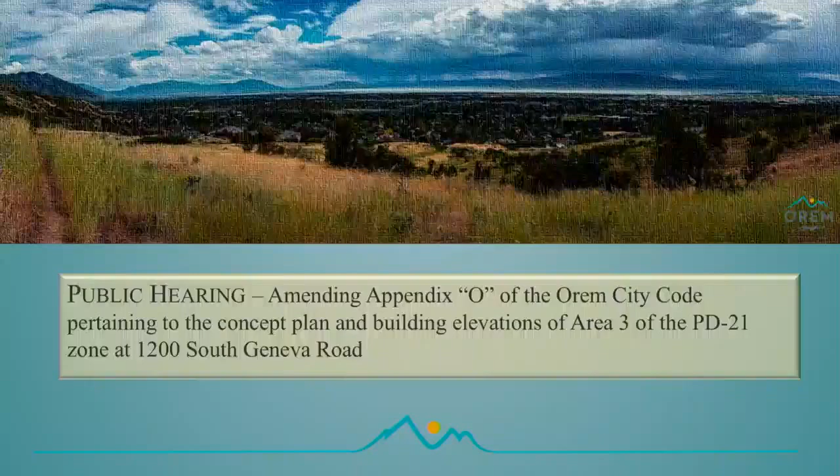So, as you mentioned Mayor, before you tonight is an amendment to the concept plan and the elevations proposed for Area 3. If you recall, back in August of 2015, they came before you and made modifications to the text and the concept plan. As they went into additional design of the project, they discovered they needed to make some modifications to that concept plan to make it more functional and pencil for their project.

Just to point out the areas: Area 1 is the Wolverine Crossing, which is existing. Area 2 is the University Lofts, or Parkway Lofts, currently under construction. Area 3, adjacent to University Parkway, is the area we're talking about tonight. So we're only discussing Area 3 pertaining to the concept plan.

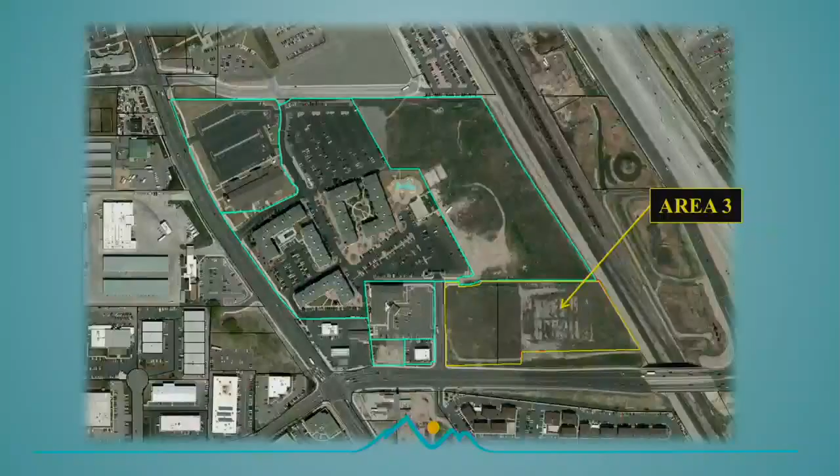Currently they have on the concept plan 214 units, 627 bedrooms, and 1,024 total beds. As you can see before you, they're proposing 437 total units, 927 total bedrooms, and 1,548 total occupancy units. The PD21 zone was set up to have a minimum standard, not a maximum density, so they're well within that since there is no maximum. As long as they can meet the parking and other requirements of the ordinance, they're well within their boundaries.

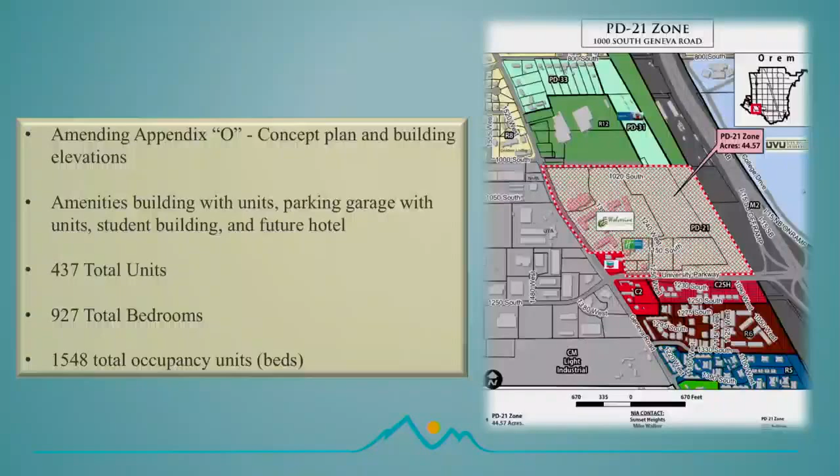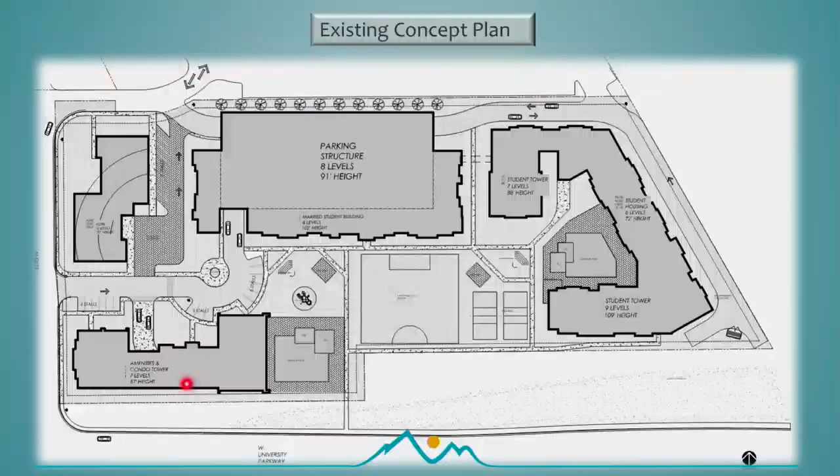What they're proposing is to modify the concept plan before you tonight. This is what was approved back in August. You can see on the concept plan that they originally had wrapped married student housing at this location. They had the student towers, as they were calling them, at this location, the amenities building here, and a future hotel here. They're keeping all the same features, just modifying portions of that.

You can see the parking structure has reduced in overall footprint, but they're keeping the same height, with a full height structure having just 1 unit per floor for that entire section. So they're basically reducing that, shifting all those married students into a combination of student wing and married wing that you can see at this location.

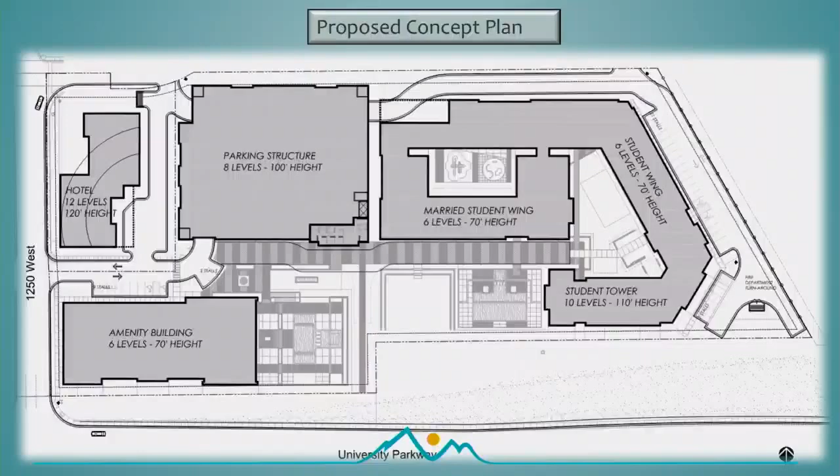The 120 feet is the maximum height within the zone. The ordinance was changed back in August to reflect either 120 feet or what's listed on the concept plan. This concept plan lists each building and the heights that would be approved at that location. So the hotel would still be 120, the parking structure at 100, the marrieds at 70, and the student tower next to University Parkway at 110. The overall amenity building would be 70 feet.

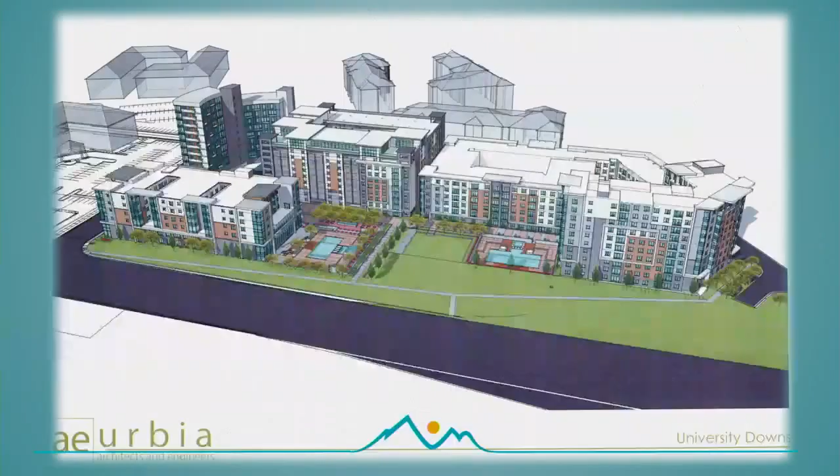So you can see compared to the existing and the proposed, they still have the outdoor recreational stuff, the amenity stuff within the amenities building itself, and parking is accommodated for as well. This gives you the overall concept of what they're proposing. You can see the lofts building in the background—this is what you'll see from University Parkway.

The Planning Commission—I can go through each of the individual buildings if you'd like—but the Planning Commission reviewed this, and basically they're not changing any text, it's simply the concept plan and the elevations that are before you tonight. So I'll be glad to address any questions.

First of all, is the applicant here? Could he come forward? Jason, a question I have—if you can come forward and just sit right there with Joe.

It appears that your population has gone up by about 50% with this program. So how does that affect the parking? The parking is 0.65 per occupancy unit. An occupancy unit is a bedroom that's 110 square feet or less, and if it's over 110 square feet, we count it as 2 occupancy units. That's why the number of beds versus the number of units is different, and that's how we calculate that. So this project meets that parking requirement.

So they've been accounted for this? Yes, and if you can see, the overall concept plan shows—the original, and the architect is here to explain that—but the parking deck will finish at this level right here.

There's some meeting space and other things that will be on top once the hotel comes in. The original build will just be the foundation, footings, and all that to support the additional elevations, but they will not add this element until the hotel is built. So this would be the top of the parking structure.

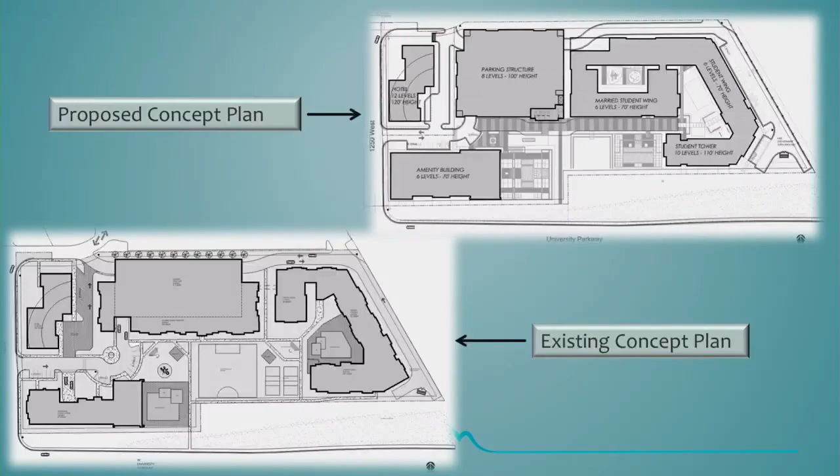Councilmember McDonald: Could you go back to the slide that shows it drawn out? Those other buildings in the background in gray are just the existing land around it, not the subject property, correct? The Parkway lofts, excuse me, they're under construction currently, so this is an outline of what they look like.

Do you have an idea of which order you'll be building the buildings, or are you going from the ground up all the way? Are you building this in stages, or everything but the hotel right away?

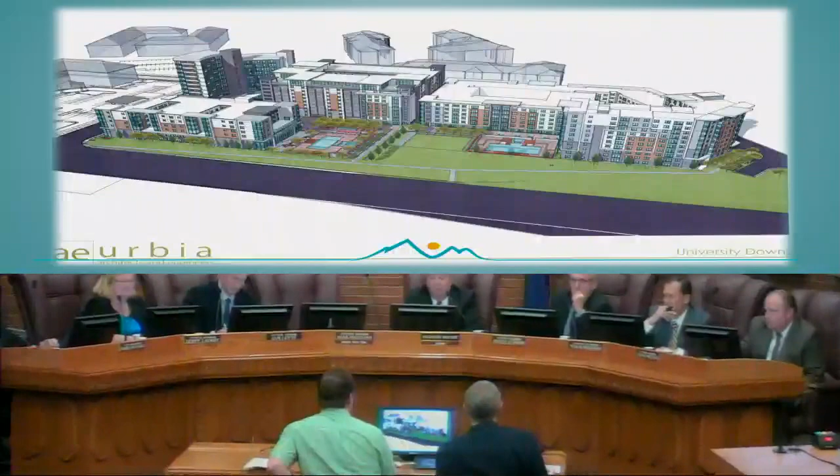So the three major buildings are going up right now. The hotel is being planned for in the future. We just don't have a hotel chain and all that yet. You don't have a flag to fly yet? Not yet, correct.

Any other questions? Councilmember Sumner: You have a married wing and a single wing, is that correct? Yes, that's correct.

Can you legally do that, designate this as married and this as single? I don't know. It's strictly just for us to understand the market we're going after. More than likely, because of the market research the owner has done, there probably will be spillover into the married wing from single students and vice versa.

We're calling it the married wing because it will consist of 2 bedroom, 1 bedroom, and studio apartments geared more towards a student who is married, though it could be single students too. Whereas in the student wing, on the far east, those units are 3 bedroom and 4 bedroom units with shared bedrooms, whereas the married student wing units are more geared towards a single bed.

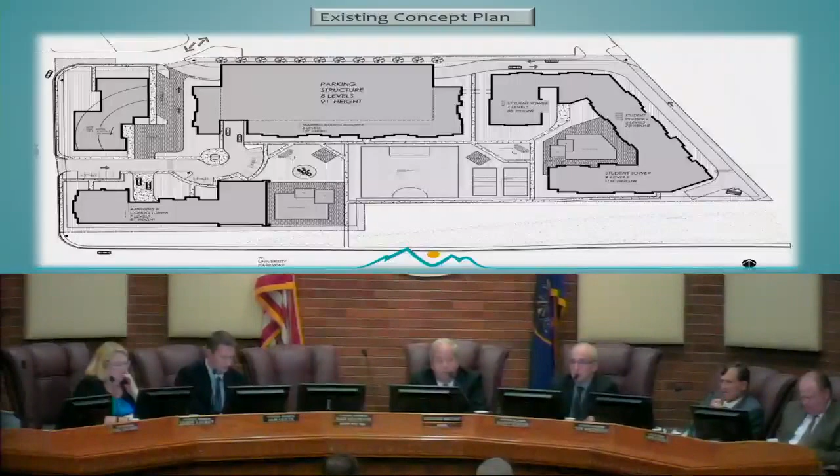So Jason, in that picture previous, it says amenity building and condo tower. So are you selling condos as well? Yeah, the owner does want that option to have those be condos. If there's a high enough demand, those will be condos. If there's not, then they'll be student housing.

And I know you've told us this before, but what amenities are you going to be offering? In that amenity building, there is pretty much everything you can think of. There's a full-size NCAA basketball court on the far east, and then kind of right next to the amenity building there on the east, there's 2 pools. In the middle, there will be a soccer field. You see the nice green grass area there.

In the amenity building itself, there's the basketball court, there's a 2-lane bowling alley, there's billiards, there's a stepped theater area for room for about 50 to 100 people. Kind of a lounge theater, not really like a movie theater, but more of like a lounge theater. There's an exercise room on the 3rd level and a tiny daycare facility as well. So that's kind of, and then the rest will be condos in the amenity building.

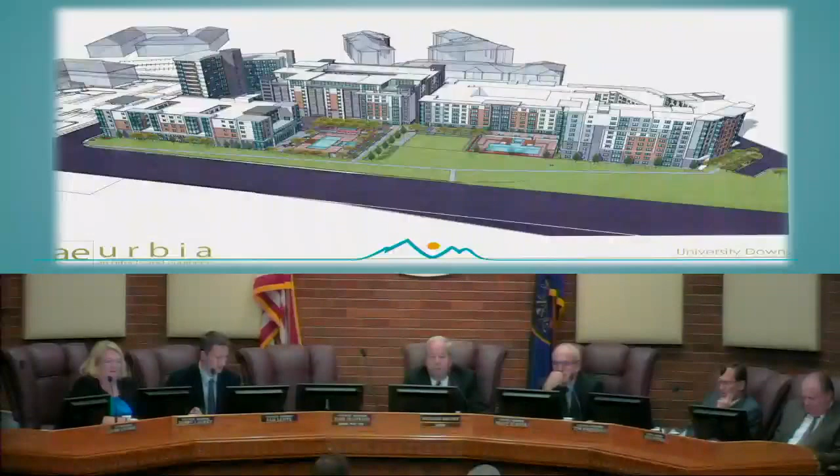As well, there's also kind of in the courtyard of the student building, what we're calling the donut area, where the married students are. There's a splash pad and kind of a playground for the kids, and then a volleyball court and a small climbing tower in the courtyard of the student tower. They won't be without something to do then.

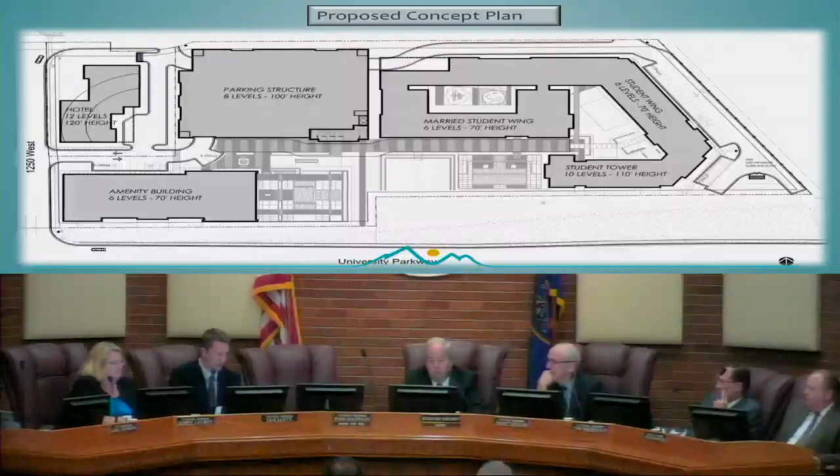No. Councilmember Lentz. So this question is for Jason. A little while ago, there was a city issue where there was concern over building heights, and one of the concerns brought up was that the noticing radius was not wide enough, and people were concerned that this is going to block my view, but I was not notified. I'm just wondering, with that being across the freeway from the majority of single-family housing in that area, how much of that single-family residential area did we catch? I was trying to look through the names of the individuals that were noticed for the neighborhood meeting, but with that being a higher structure, I'm wondering, did we get sufficient notification for the surrounding properties?

We did 1,000 feet, which is what the council recommended, and they had eight people show up. This has been ongoing, the ordinance has been in place for many years. This is simply just a concept plan. The actual heights have been approved because there is a maximum 120 feet, and that's been in the books for quite some time. So this is just a modification to that concept.

Thank you. Seems like to the south, you have mostly apartments across the street. There is apartments. And then to the north, you have the UTA station. If we're going to have height, this is one of the good areas to have that additional height.

Councilmember Sumner. Was a new traffic study required on this, Jason? As part of the site plan, they were required to do an amendment. Paul Goodrich is working with them to get that. So that's not been performed yet? As far as my understanding, it has actually. It was finished this week, so they'll be part of our review to get to the Planning Commission next Wednesday. Okay, yeah.

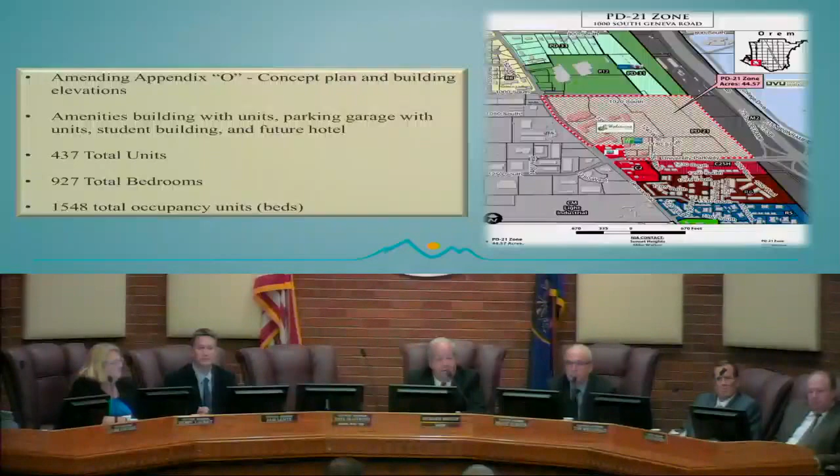Any other questions from the council? This is a public hearing, so we'll go ahead and open it up to the public. Anyone who would like to speak to this issue, please state your name and address and keep your comments to 3 minutes.

Seeing that no one is coming forward, we'll go ahead and bring it back to the council and close the public hearing portion of this. Any other comments from the council?

I would like to make a motion that the City Council amend Appendix O of the Orem City Code pertaining to the concept plan of Area 3 of the PD 21 zone at 1000 South Geneva Road.

Is there a second? Second. Okay. Councilmember Spencer, aye. Aye. Aye. Aye. Aye. Aye. Okay, the ordinance passed.

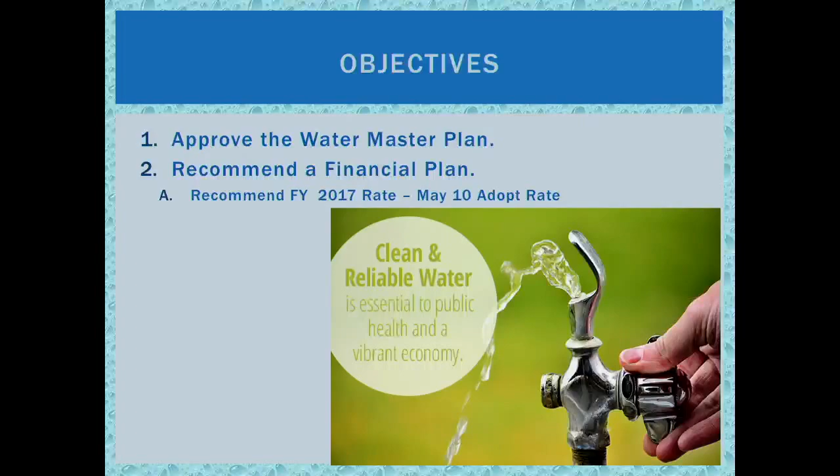But we have 2 objectives tonight. We want to approve the 168-page Water Master Plan, and with that, recommend a financial plan that goes with it to get from where we are to where we need to be.

Our system is not unlike a similar system with water up above. Gravity is our friend in the water business. We use gravity to bring the water down. It provides our pressure. We don't have to pump it. It keeps our water costs low.

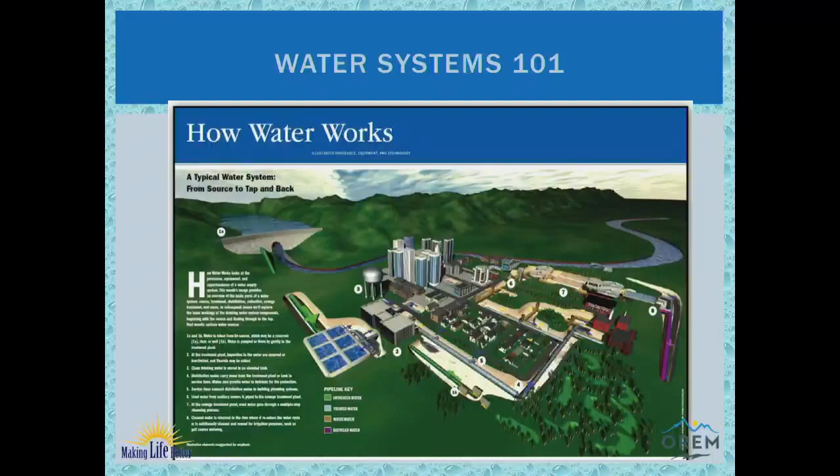We have sources, we have conveyance, we have storage, and we have distribution. That makes up a lot of the components within it. I've broken it down into 4 simple components when the reality is it's a very complex system to run, to bring water that originates up in the Uinta Mountains from snow on down through the river systems, a couple of reservoirs, canals, or rivers, some wells, some springs, ultimately makes it clean and awesome right to your tap.

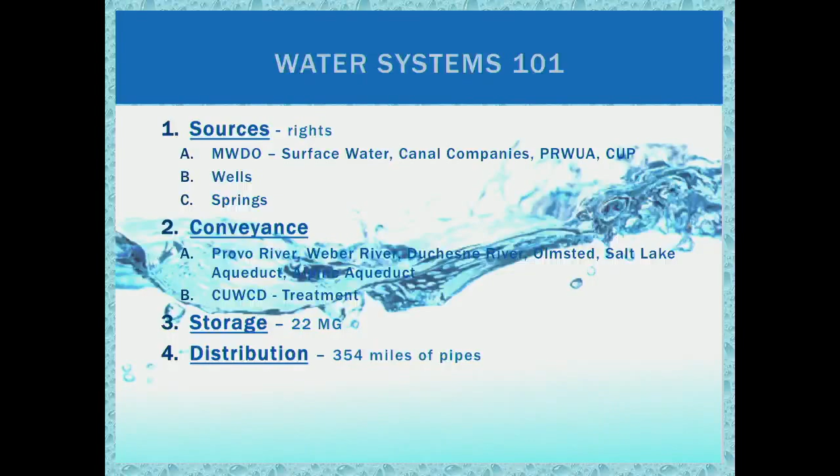It's not seen like some of the other things that are out there. We flip the switch on and it comes on. We can't touch and feel the pipes that are under the ground. Even the walls, even the pipes in your home are covered, and you have the fixture there, and it's there.

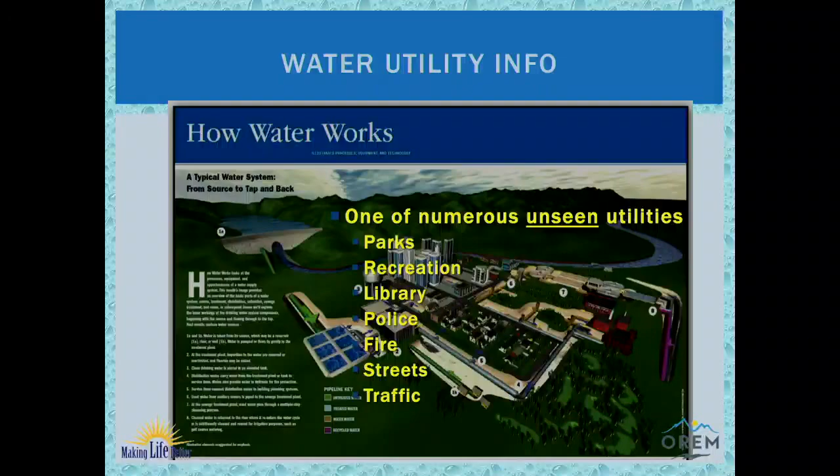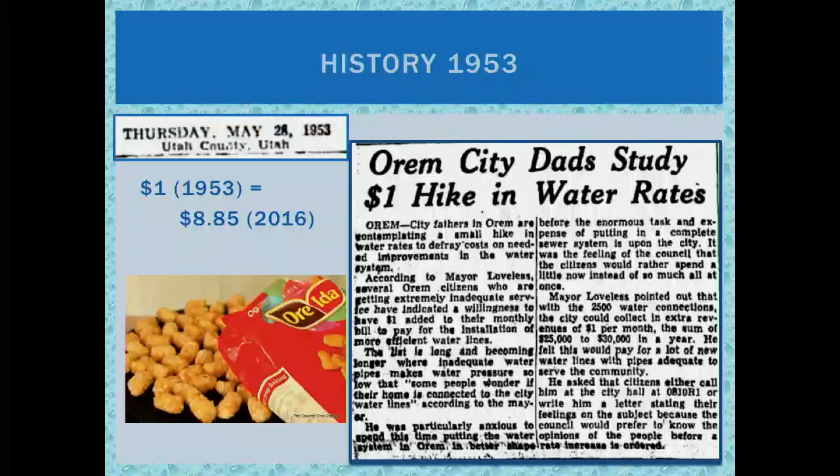1953 was not unlike a night like tonight, where the Orem City dads and now mothers had a decision to make of a $1 increase, which today would be $8.85. In that same year, Ore-Ida introduced their tater tots, which were simply leftovers from their French fry line. Additionally, in that year, Corvette introduced and released, ironically built in Flint, Michigan, this beautiful vehicle. We'll get to Flint maybe in a different discussion.

1955, there was a lot of growth going on. If you look at the little sentence there, you can't read it, but it reads: Orem, the city of tomorrow, the city of phenomenal growth that has only just begun to grow as Utah County extends its industrial expansion. Part of that same newspaper article, they were talking about the growth, the commercial expansion, recreation, a long history of arts, and a long history of culinary water supply in Orem.

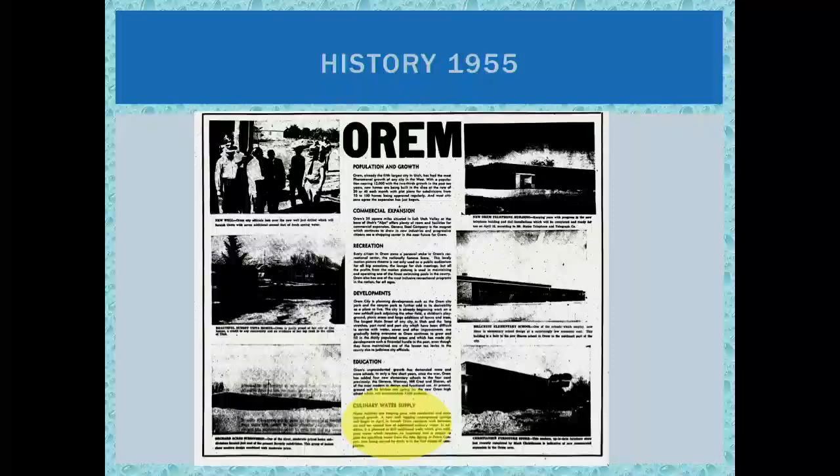In 1960, the manager tells Orem to increase the water. In that same newspaper, T-bone steaks were 69 cents a pound. It made news that a Mapleton woman broke her arm, and right underneath that, Mr. and Mrs. Dwayne Roberry and their 3 children moved into their new home over the weekend, and it was newsworthy.

So we move forward to 1962, and again, Orem is experiencing a need to increase its rates, this time for treatment plant expansion. Prior to that, water would come, we would chlorinate it and put it into the system. FHA said, you need a treatment plant or we're not giving out any more loans. In both water and sewer, an equivalent $7.10 rate was introduced.

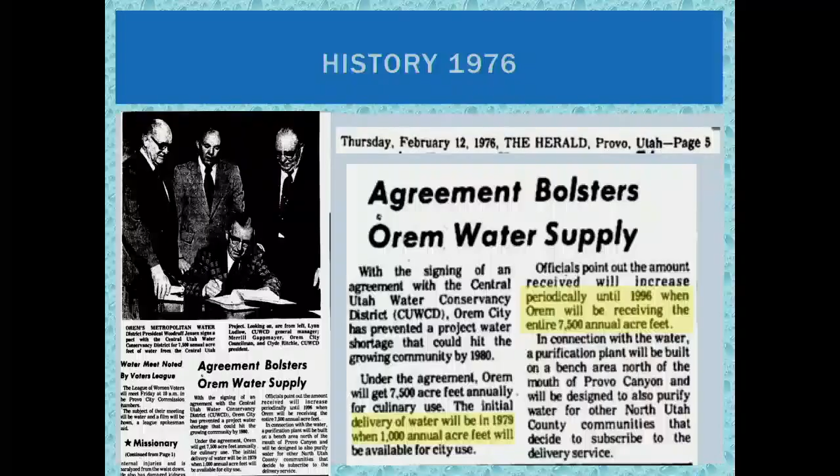Every day we have a very talented staff led by Lane Gray, our water section manager, that are qualified, competent, and proud employees of the water system that they manage. I hope if you see them, you give them a thanks, because they work after hours, they work on cold nights, they work on hot days, on call, and even those who aren't on call that respond to those on-call emergencies should be thanked. I can't say enough about our section and the work that they do.

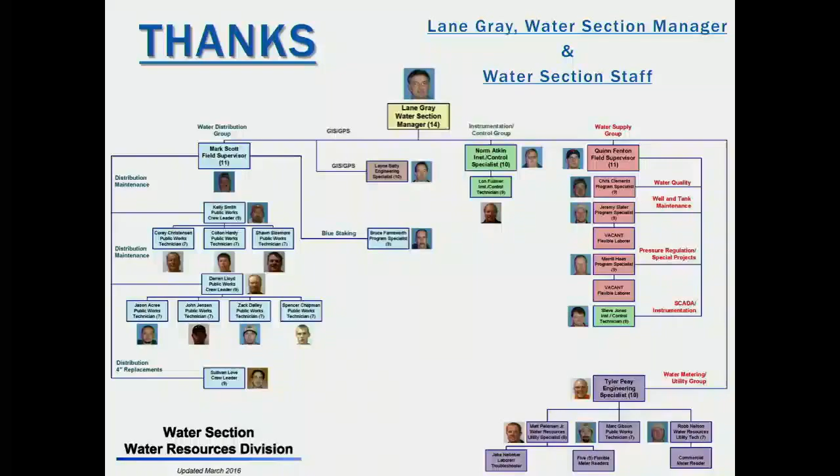So here we are tonight. We've approved the stormwater plan, we've approved the sewer plan, and we've recommended moving forward with the financial plan. Stormwater and sewer are a little bit different. In stormwater, we had a pipe network and detention basins that we want to install, and we want to help protect our water supply. It's not quite built out yet. It's a newer utility, having started in 1996.

In sewer, we recently had a treatment plant upgrade of $14 million, so we didn't need to discuss that. The focus there was mostly on the collection system repair and replacement program, in a preventative approach.

The water system has 5 main areas of focus in the first 5 years, and I want to emphasize that these are our needs for today. The 10 million gallon tank is a need that we have today. The 2 and 4 inch undersized line replacements are projects that went in yesterday and now it's time to replace them.

Water reuse is implementing a plan that was put in place years ago, when the golf course and Lakeside Sports Park were first planned and designed. They were always planned, from an infrastructure standpoint and a water supply standpoint, to be supplied with reused water from the Orem Water Reclamation Facility.

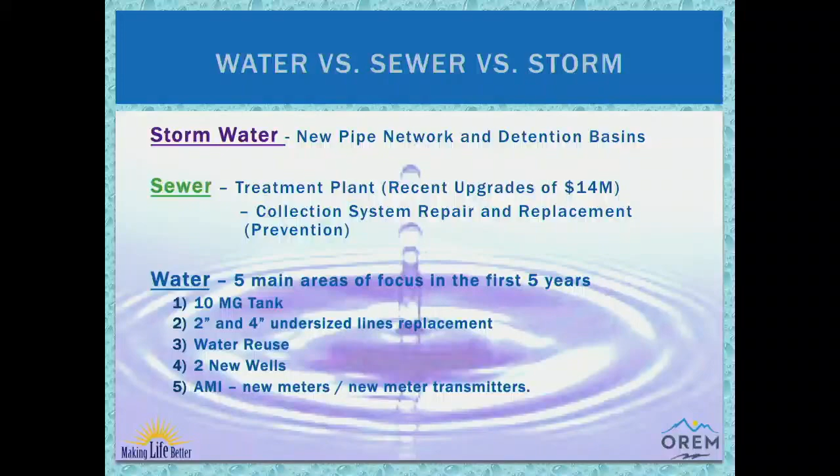So what do you expect from your water utility? Clean, reliable, abundant, and we are expected in the water industry to be responsible.

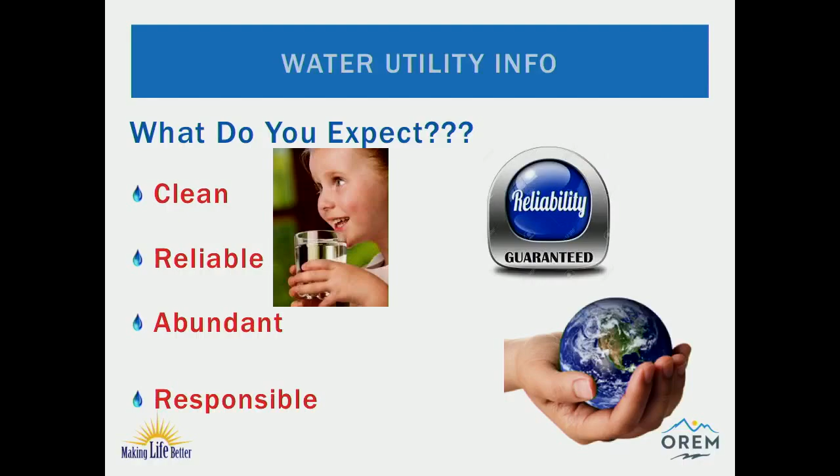The purpose of the master plan: resolve existing and future deficiencies, do a rate study, and it'll be a working document as we gather new information and update yearly usage and trends. The scope of the project was really simple - you'll remember the last slide with many lines and many different pieces and parts, but I boiled it down to look at what we have right now, look at where we are in 2025, look at what we need for 2060, and what are the financial components to get there. That's really the scope of the master plan.

Part of the scope was to provide public involvement, and the city staff and we formed the Public Works Advisory Commission. We had public open houses, newspaper articles, mailers, the website, work sessions and meetings, and the infamous chat with a bureaucrat.

We're going to dive into the nuts and bolts of the master plan itself. After we go through a little bit of the master plan, we'll start talking about the rates, trying to do justice with all the information that's there and the water system in the next few minutes. I'll go through these that you've seen.

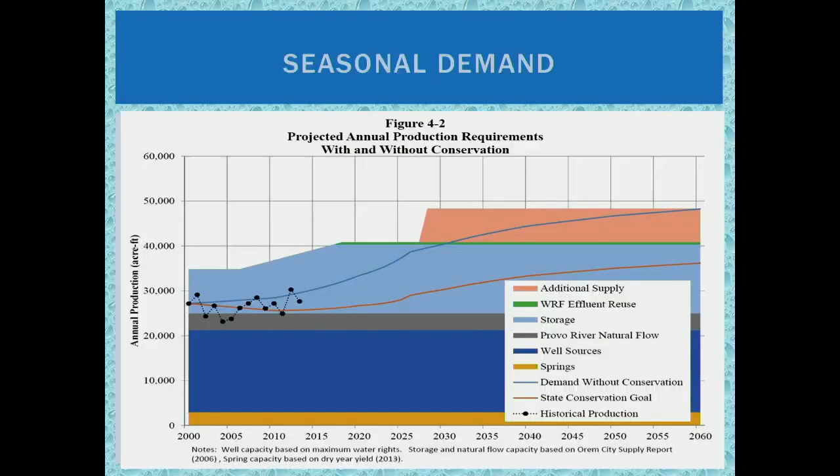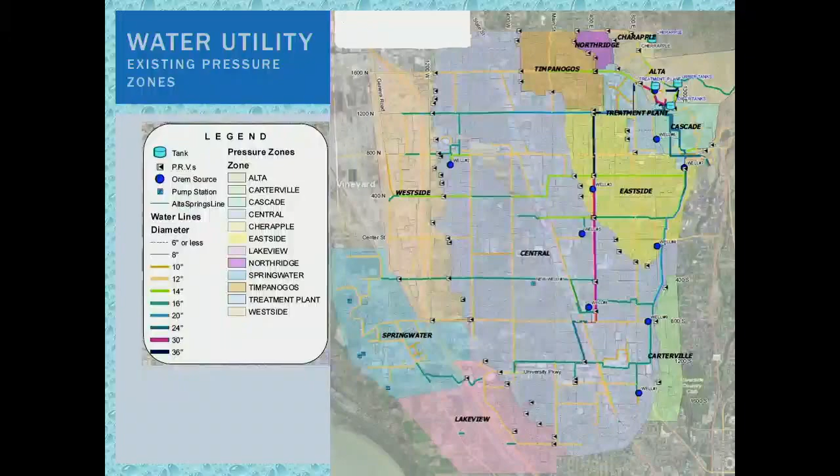This map will set the stage for the next few diagrams. The light blue tank-looking items in the northeast corner of the city are our water tanks. The dark lines throughout the city streets represent the backbone or skeleton of our large pipe network. There's a pipe underneath pretty much every city street, so you can count on a water line being there. The different shaded colors represent pressure zones, which represent different contour lines and service areas.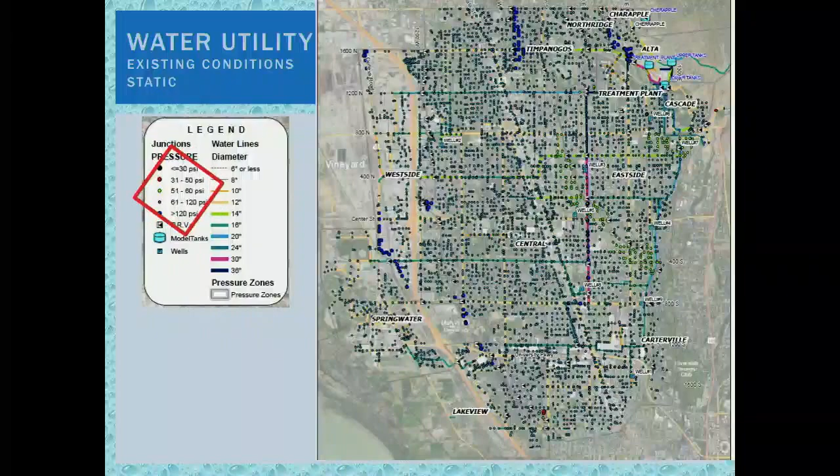This represents existing conditions now, which we call static, meaning no flow going through the system. Peak conditions represent a dynamic condition where everybody turns their sprinklers on and there's a lot of water going through it. So under existing conditions at peak hour, we start to see some red.

If you're in your home and you experience 30 to 50 psi, you start wondering where your pressure is. But as a water system, we represent that that's safe and okay—not comfortable, but safe.

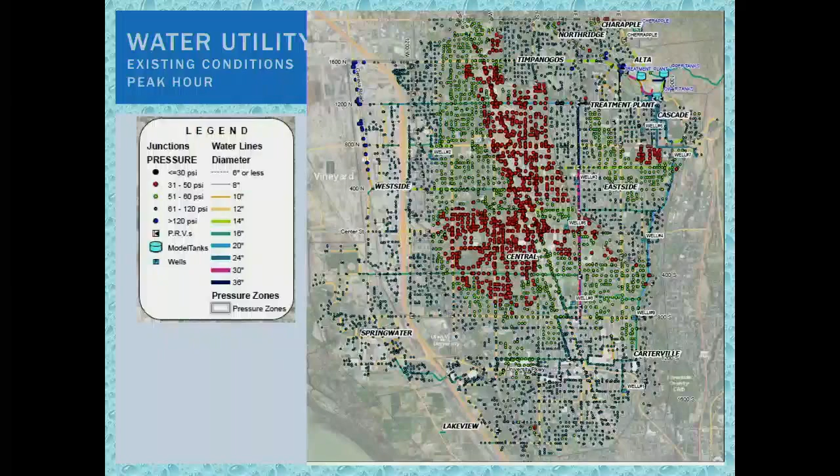We move on here to show some of the water projects proposed in the next 10 years of that pipeline system. We do show the Southwest Annex improvements, but we're not directing any money there. The council gave direction that the developer will put in all the improvements, and we are not funding anything in the Southwest area—they are just shown for reference.

The council adopted impact fees that will also be in place for the Southwest area. And in the future, there will be impact fees citywide for the city as well.

Take note of projects C6 and C1 in 2034 and 2025. If we don't do a water reuse project, that project will need to be moved up. But we're hoping you see the need and approve the funds necessary for that, and we're assuming that will happen.

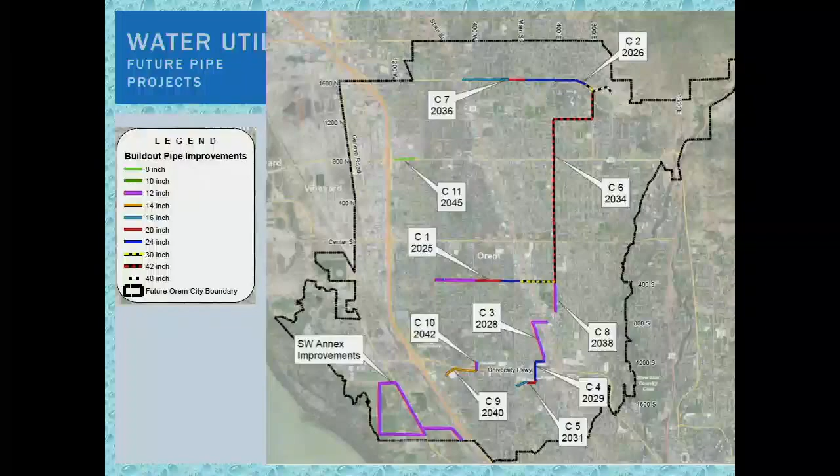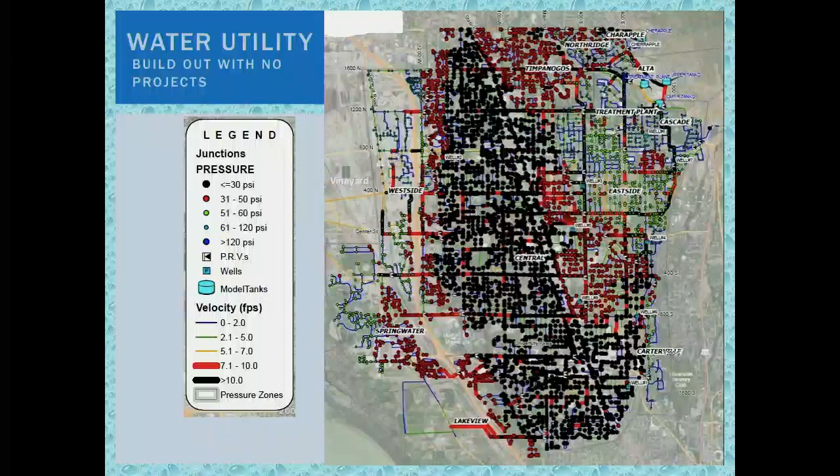If we don't do any projects—our tanks, wells, and conveyance system—by build out, this is what our map looks like: a lot of black, a lot of red, a lot of concern. If we build our projects, this is what our map looks like: green and blues, with some reds scattered throughout.

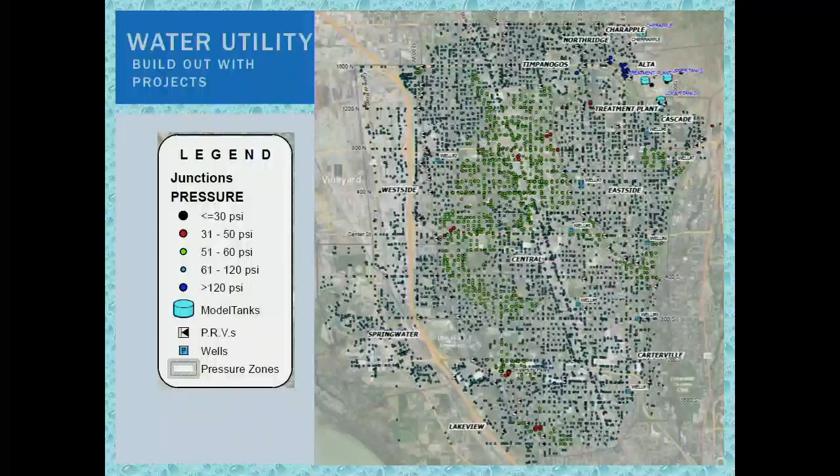So what are the consequences of not building a 10 million gallon tank? We would in fact be in a drinking water system violation, and that's not a good place to be. Orem's never had, to the recollection of existing employees dating back 30-plus years, a system violation that would include any such violation, most notably a boil alert or anything like that. That would eventually spark a development moratorium by the state on both commercial and residential.

It overtaxes our wells and ground sources. We run out of water during peak demand times, jeopardizing fire protection. The only recourse we would have as a city to manage this is to put in water restrictions. Every-other-day water restrictions have a small effect—we're talking about probably bigger water restrictions than that.

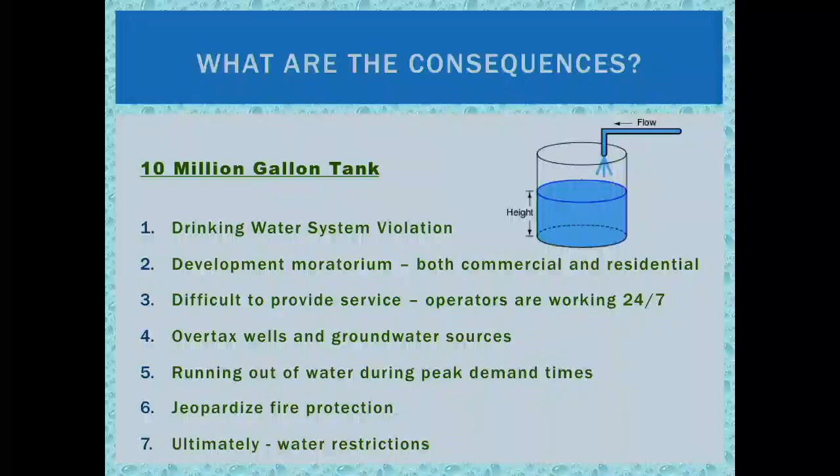For 2- and 4-inch replacements on a day-to-day basis, we're okay—people can do what they need to do. The challenge we have is in a fire scenario. We're not okay, and we do have fire supply issues near elementary schools; we do have some throughout neighborhoods. If lines are 4-inch, they're definitely old enough that we're going to start to see increased leaks, water outages, and potential water quality issues.

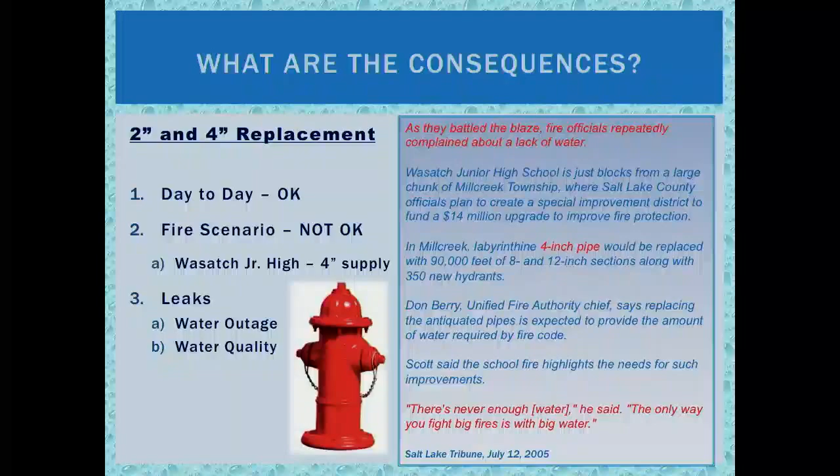I mentioned before about water reuse. If we don't implement the water reuse program, we will have to speed up the projects down 4th East and 4th South. We are experiencing today low pressures in the central zone, and we are experiencing customer complaints—that's an existing need of today, not due to any growth in the future or Vineyard.

As I mentioned before, that demand is really a small portion. It should be noted that the Metropolitan Water District of Orem's boundaries always included the Vineyard area from the inception in 1935.

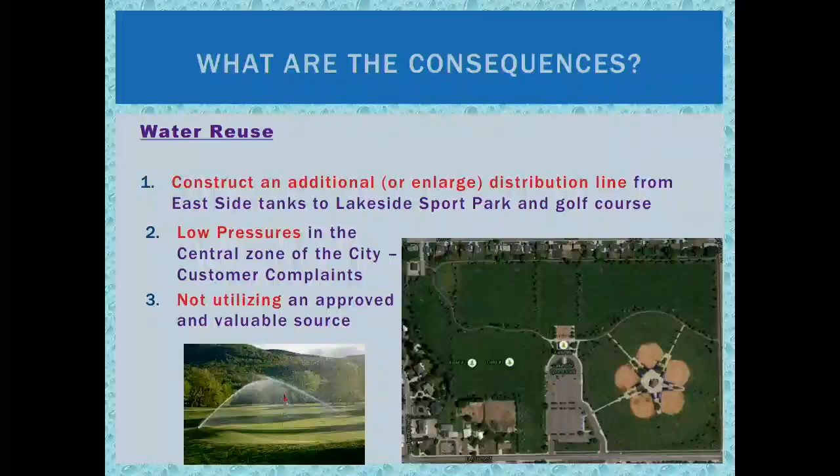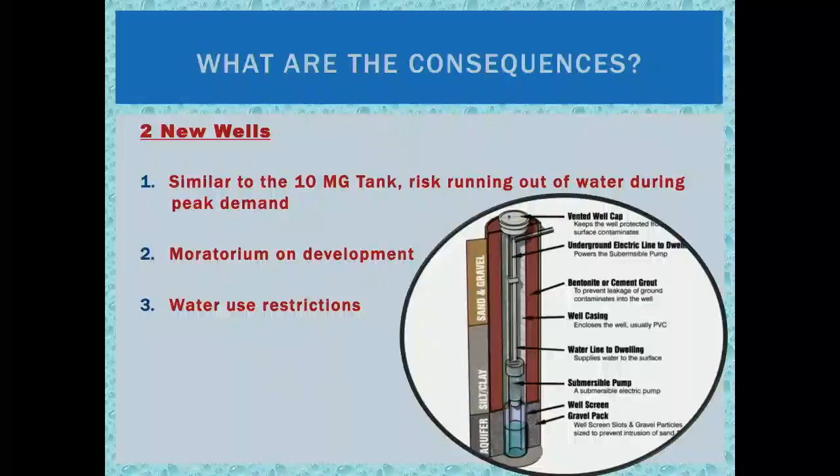We already mentioned the valuable resource that water is. Not implementing the wells, constructing new wells has a similar supply issue as with the tanks. The wells will augment the supply, and we risk running out of water, which has the same implications as a tank.

We've talked a little bit about meter replacement. AMI stands for Advanced Metering Infrastructure. The governor has challenged, and the legislature took the first step in mandating water conservation-oriented rates, through block rates or a tiered structure, which we're going to get to.

We have meters in the city that only read 30% of the flow. We have meters where if someone takes a shower, it doesn't record their water usage. We have meters that if someone does use the water, it records 120 or 130% of their usage. We did an AWWA study, and we came out in aggregate about 96.5% of our readings. But there was a meter on the low end of 30%, several meters in the 80%, several in the 120%.

We need to bring that and rein that back so that customers are paying what they ought to. We already talked about the optimization and the education that comes from that.

And the one item that's not really got a dollar figure on it is the continued risk of putting meter readers out on the streets. They've had an accident on occasion. They run into dogs, they run into bees, fences, and anytime you put people out on the streets in traffic, there is a risk associated with that.

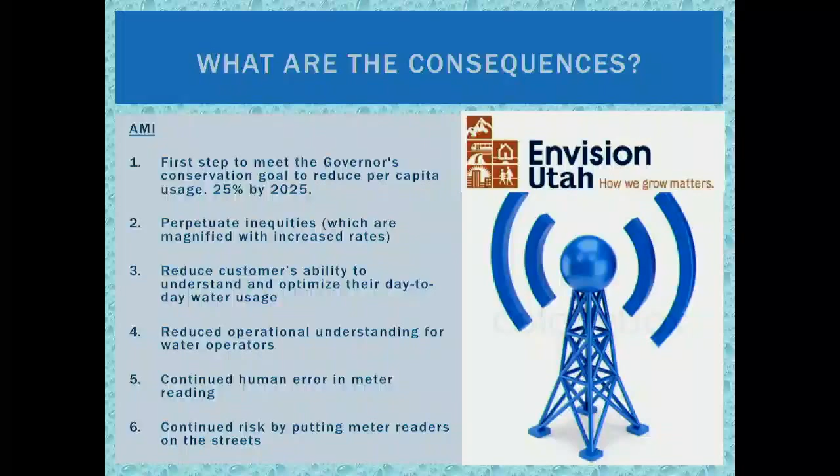So the council gave us direction after we presented some initial plans to bring a 5, 7, 10-year and a bonding scenario.

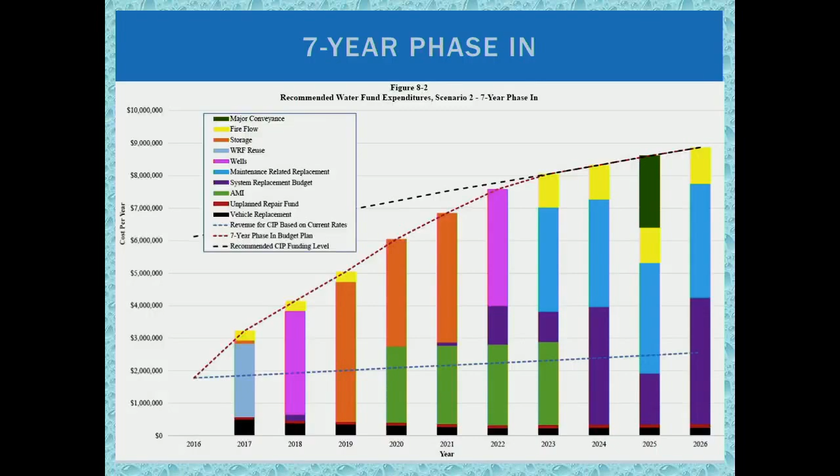The 7-year implementation plan stretches out some of the projects. You can see that we need 3 years of saving for the tank to be built in 2021. The AMI, which is the green bars, gets stretched to start in 2020 and the final phase in 2023.

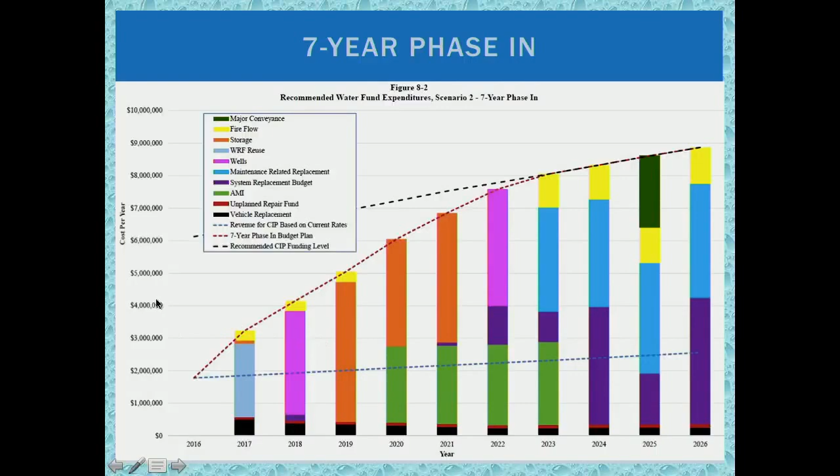The 10-year plan stretches things out a little bit further. The most notable, going back to the 7 and the 10, is we get a few of the fire flow issues taken care of that are in priority 1. And then in the 10-year plan, we still have to push those out a little bit.

We have to save. Only doing a few projects or none in 2019 and 2020 and only saving money is very difficult. That presents a very large challenge when the roadway plan is to perform overlays and reconstruction. And I would like to put in water lines ahead of that, replacing those 4-inch lines or those aging lines that have a history of leaks prior to that. We basically have 2.5 years here where we don't replace any of those lines.

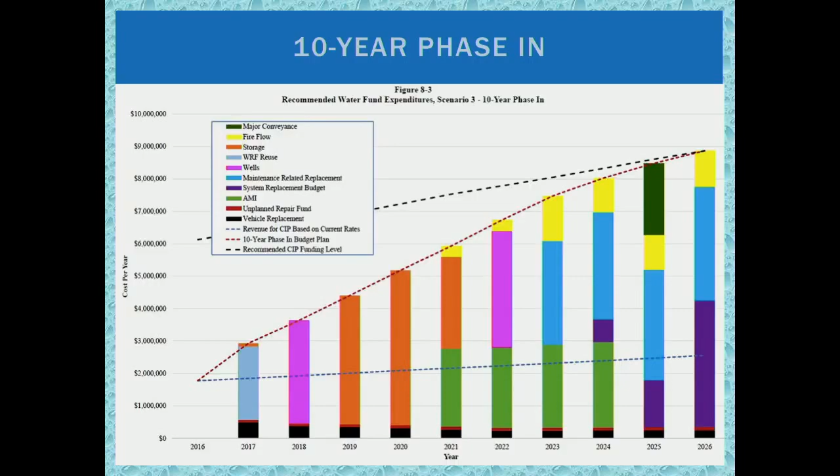The bonding scenario is shown here. It puts all of the fire flow in 2018. It still builds the tank in 2021.

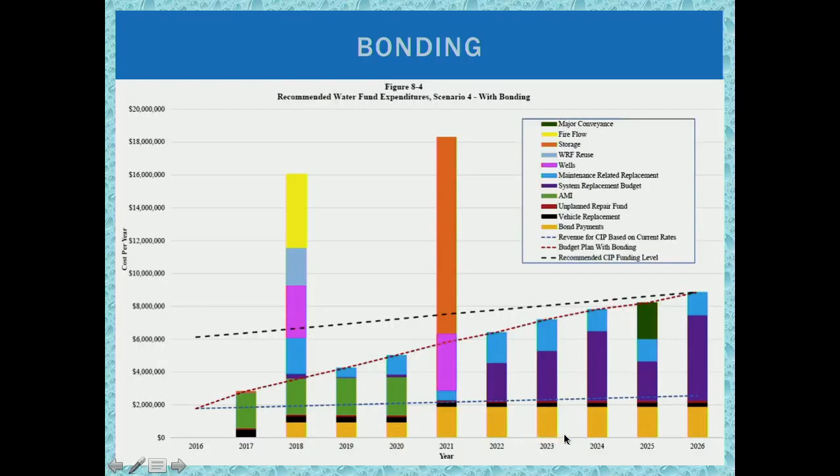But the downside to that is the bottom yellow base there, where we do have bond payments and bond obligations to take care of.

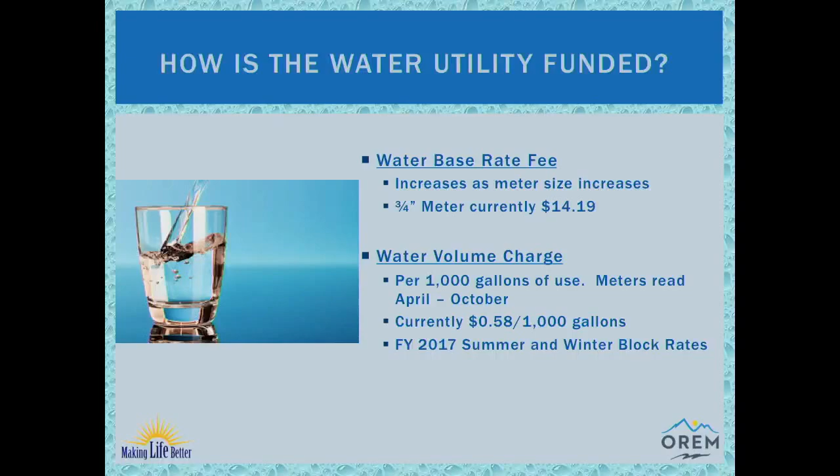So how do we fund this water utility? How do we fund these projects? Well, we have a base rate, and the 3/4-inch meter is $14.19, and we have a water volume charge that's currently 58 cents per thousand. I told you before that the legislature said no more uniform rates, so we have to implement a block or

a tiered structure that encourages conservation. So I'm going to show you the next charts that are a little bit busy, but it has the base rate, the winter rate, the summer rate, the average monthly bill per single-family home, and the monthly increase. But the most important aspect of this chart is the total CIP. So we can adjust all of the columns to the left

in order to reach the total capital improvement project budget. So when I ask you to approve a plan, a move forward plan, whether it's a 5, 7, 10, or bonding, what you essentially are doing is approving the total CIP allocated for that year. We can tweak some of the items to the left to match that total CIP. This is what we've come up with to try and reach that level, to try and make it gradually get there, to spread it out. Basically, the summer usage rate equates to about 1.5 times what the winter usage rate is.

The 7-year rate leaves us with a $5.6 million CIP deficit. The 10-year implementation leaves us with about $10.7 million in CIP deficit, and through the bonding scenario, we made that neutral by effectively setting the bonding amounts as needed to cover the projects.

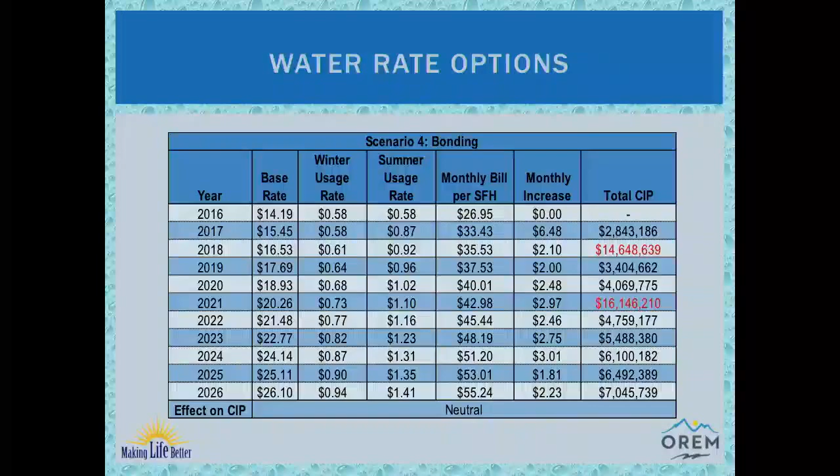Remember, in 1953, we were in a similar situation. This is a summary of all the 5, 7, 10, and the bonding. And I put on the open house just so we can show that we held open houses and presented this to the public. And that was a starting point, and we've evolved. Now we have different scenarios on the table. They all equal $2.83 per month on average over the next 10 years.

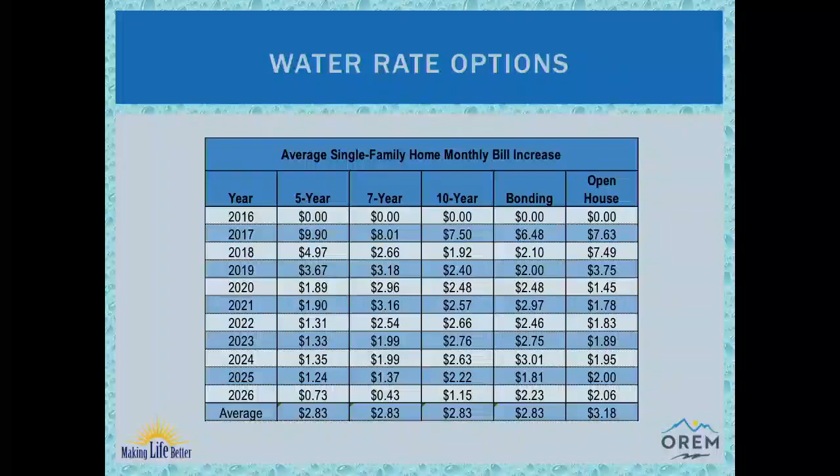Here's how we compare to other communities. Right now we're sitting at about $27, $26.95. For our 2017 rates, the dark lines represent where we are today. The lighter lines represent the different scenarios, and of course in purple represents the other cities.

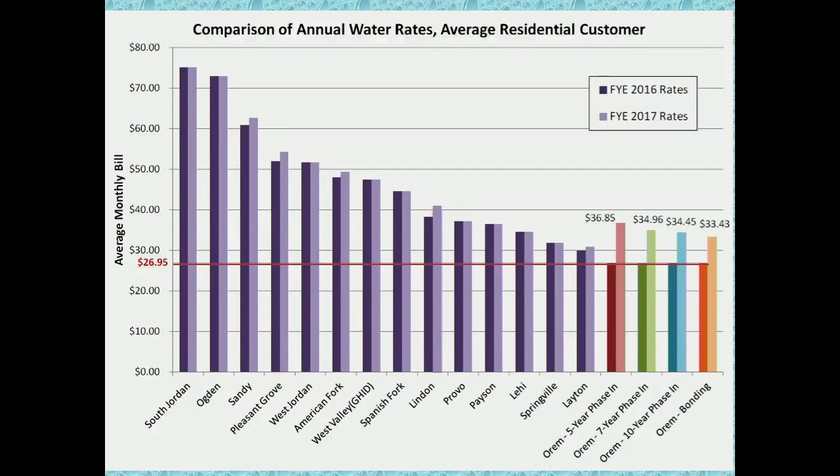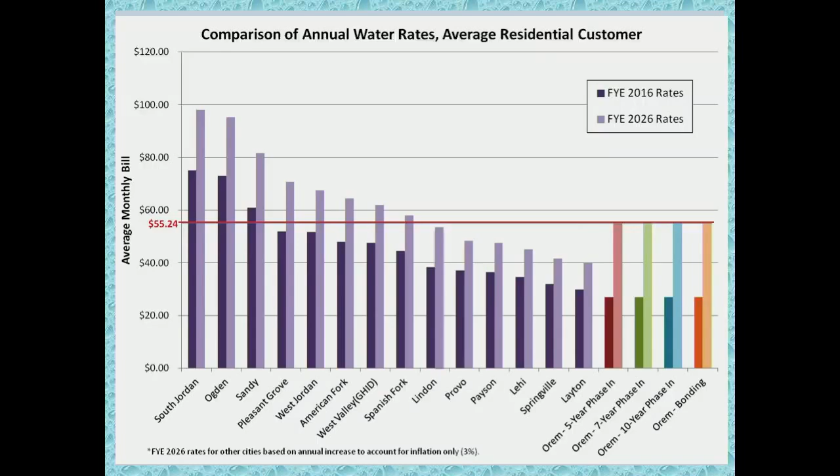So what do we do now? Hopefully we adopt the Water Master Plan. We accept the user rate study. We recommend a move forward plan. And each year we move forward with that plan. We're going to bring what you recommend to you next week through the rate adoption, and then you'll see it again in the upcoming budget meetings. That's all I have for today, and we'll open the floor for questions.

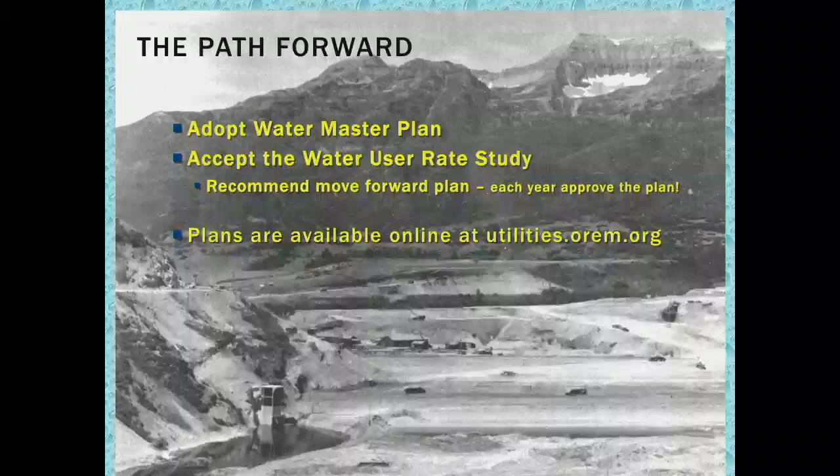That's a very good presentation. I appreciate what you're showing there. It's obvious that if we don't stay up with our infrastructure, if we don't reinvest for the future, that we will have problems in the future. I've actually seen one city up to the north that had not reinvested in their water lines, and their water lines started to deteriorate to the point that they had some major expense. Orem's been very good, I think, about providing water supplies that are plentiful and having good infrastructure and having good tasting water. So I think those that have gone before us for many years ought to be congratulated, and I appreciate what they've done. And this is an important step. There's a lot of things to look at, and it's costly. So there's a lot to consider.

Councilmember LeRae: Today, when I was talking to some neighbors, I had a little pushback on the summer versus winter rates. A gentleman said to me, I don't want to be penalized for conserving. I want to pay what I use, and if I conserve more, I want to have my rates reflect that. So have we looked at the tiered rate where the more you use, the more you consume, you'd actually pay a higher rate per gallon versus the summer versus winter? Have you analyzed just the more you use, the higher you pay?

Sort of scenario. We did look at all forms of different funding and billing methods. We tried to, because there's a lot going on with all of our rates right now, keep it to a simple transition for now. We can always change that in the future, but in our discussions with staff and with our consultant and our feedback from the public, we felt like a winter and a summer rate were our best option to keep it simple.

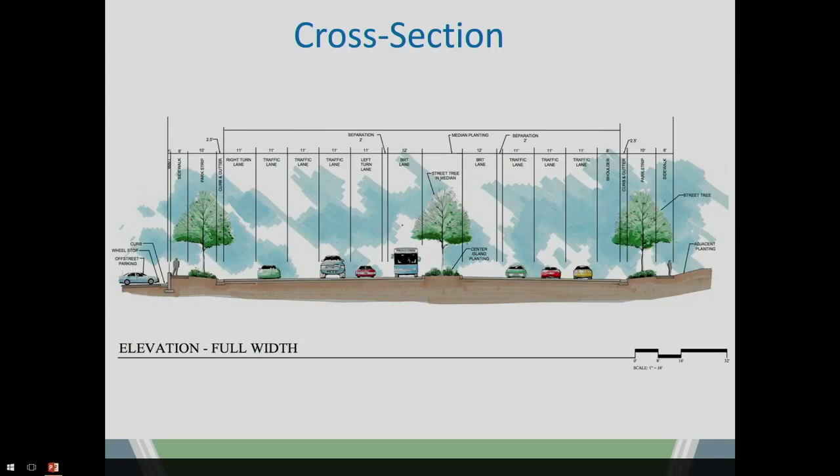Here are some of the key milestones moving forward. Design will be complete later this spring. Early summer, we will start some of the construction items. We'll start some utility work, probably 1st of June, late May sometime. And we'll have basically a 2 full construction season project. I'll show you the phasing here in a minute.

Janelle, one quick question, if you wouldn't mind going back one slide, for that concept. So it seems like there's a raised platform there. I'm just wondering, as far as being wheelchair accessible, would somebody be able to wheel directly onto the bus from that platform? The bus will probably be about 6 inches or so from that platform, but should be right about the same level. We would probably have to deploy a ramp if somebody was in a wheelchair, but that's the intention. They will be very close, and all of these buses will be low floor inside, so once a person wheels on the ramp, they will be in a low, flat area where they can wheel their wheelchair around the bus.

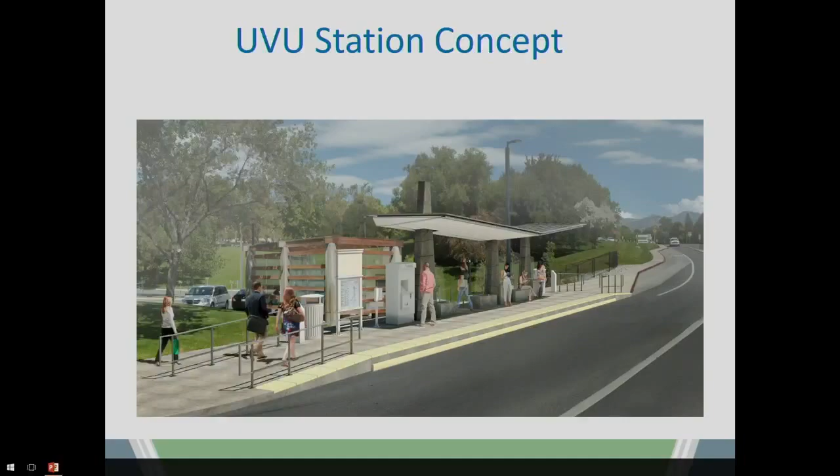Okay, thank you. And we have a committee actually at Provo, at UTA, called our CAT committee, and they are carefully studying all of our stations and the accessibility to make sure that they're all meeting their standards and compliance.

Any other questions about that? Okay.

So that's 2 full construction seasons essentially. It'll take approximately 6 months or so for startup and testing signals, getting bus drivers trained, all that type of stuff. Hopefully late winter or early spring 2018 we'll be in operation.

Yeah, go ahead. I was going to say, Janelle, so Phase 1 there, going down the diagonal, you're going to have that all done prior to the football season, right? I'm just kidding. I think they have their marching orders on that, but I don't know how they're going to be able to comply. They won't be. They're going to do their best.

I know they're working through the community right now, figuring out when major events are and the important times to have these things done. The school year is sort of ideal since summer is a good time for construction and school traffic is lower, so they're going to try to get as much done as they can during the summer. I don't know all the details of the construction phasing, but this is their preliminary plan, so I'll leave it to any questions you might have.

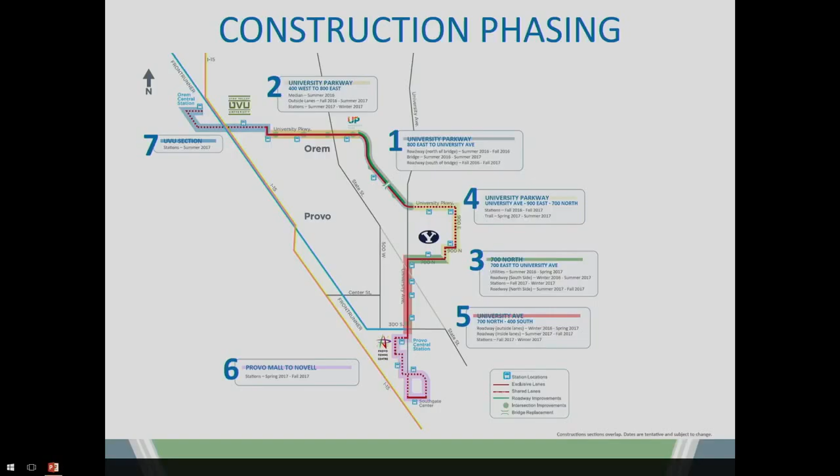Councilmember McDonald: Paul, you tried to point this out to us earlier, that most of these highways or streets that this bus is going on are state highways. I think I know, but some residents here may not know. Can you clarify, give them a pointer or something, which roads are city roads and which are state? Yeah, what we'll do, I guess, is start here with this map.

You'll see that on the upper left end of the map is the Orem Intermodal Station, that's where the FrontRunner station is. The dotted red line goes out to 1000 South of Geneva Road, so Geneva Road is a state highway. Then it goes on University Parkway, that's the next dotted line that goes across the screen towards I-15. The dotted line means it's in shared lanes with traffic.

Then it'll go over to the campus where the big main roundabout is, at what I call the front door of the campus, and then it'll come up 1200 South, which is our road, and then down 400 West to University Parkway, where the first red line is as it comes down 400 West. That's the only street that's in our lease agreement, the only street we're leasing to UTA with an exclusive bus lane on it.

But Paul, University Parkway is a state road owned by UDOT. Yes, and the next road, the long red line that goes by where it says Orem, across University Parkway to the top of the diagonal, that is University Parkway. That's where most of the exclusive bus lanes in Orem are going to be, and that is a UDOT state highway. And the green line down the hill, wherever Orem cuts off, that's a state highway as well, correct? Yes, that green line is also a state highway, and the green identifies where we're going from 4 lanes to 6 lanes.

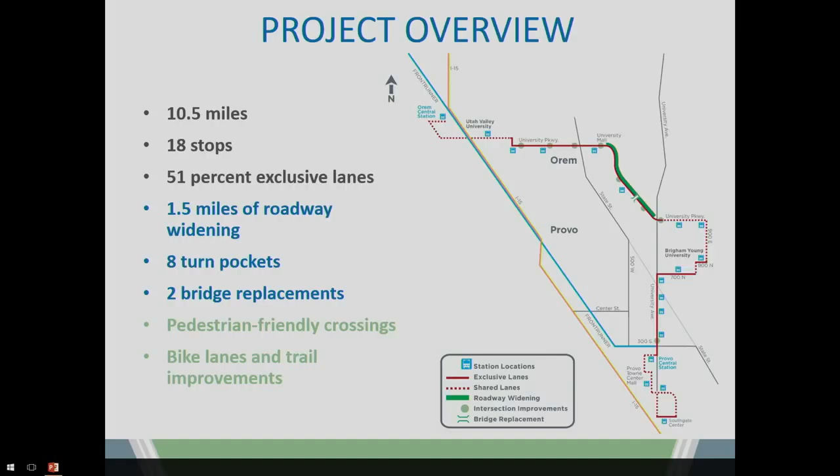So we're talking about a lease that's less than half a mile long, is that correct? Yes. In fact, here in the little photo on the right, that's the section of 400 West that we want to enter into a lease agreement with UTA for, basically from 1200 South to University Parkway, which is roughly 1300 South.

University Parkway is approximately 1300 South, so about 1200 South to approximately 1300 South. And that's the only section of the road that we have jurisdiction for, where they see the need to put an exclusive bus lane. Okay, thank you.

Go ahead, Janelle, did you have more after that? That's all I had. Just one thing - you and I spoke at the work session earlier, and you mentioned that some other cities are looking at putting in mass transit similar to this and are watching what we're doing but are trying to move forward. Can you relate who those cities are and how they're financing those projects? Just from your memory?

I have information about Taylorsville and... Hi, Steve Meyer, I'm Chief Development Officer with UTA. So we have a couple other projects that are in the development phases. There's an Ogden project from the Intermodal Center, the FrontRunner Station, to Weber State University and McKay-Dee Hospital.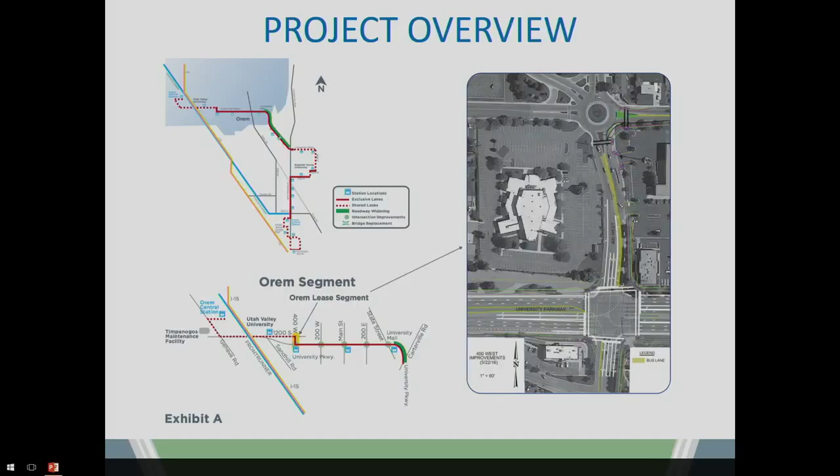That's becoming more and more competitive. It's a competitive process where our projects here in Utah compete with projects all around the country to get funded, get approved to be put into the president's budget, and get funded by Congress. So we're very proud that this project, which shows very well against their criteria, has been approved for funding. Okay, thank you.

Any comments from the council or questions? Councilmember Lurie - is there a formula that takes this ridership and can translate into how many vehicles that would be saving the congestion? Is there a way to kind of convert that? I know this is trips.

I don't know that there's really a clear formula for that. I think you can think of it more in terms of increasing the capacity of this corridor by that many people a day. People are still going to drive their cars and the city is still growing, but you've just increased the capacity of the corridor by much more than you could by just adding one more lane. Debbie, I know there was a study that found 30% of the wear and tear on the road will be saved by these people riding the bus versus driving their cars.

Thank you. Any other questions or comments? I was just going to mention, I think this has been a project that's been a long time coming, but I believe this will be beneficial. I remember watching TRAX in Salt Lake, and there was a lot of concern as to how that would go, and that has been a large success and very needed in that community. I believe that in the future, this will be very needed.